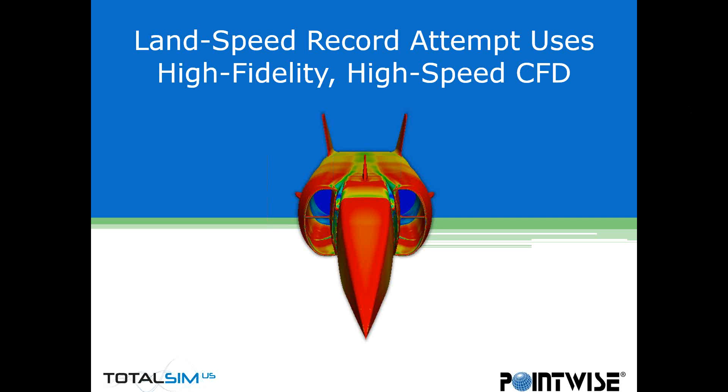Allow me to introduce the presenters for this webinar. First is Andy Liu from TotalSim. Andy graduated from the University of Southern California with a bachelor's and master's in aerospace engineering and aerospace design, respectively. He then spent 6 years working for Swift Engineering, where he performed CFD for aerospace and automotive applications, including a billion-cell automotive calculation as well as a passing maneuver simulation. Andy now works for TotalSim and helps further their aerospace capabilities using tools such as OpenFOAM and Pointwise, and Andy's actually the one that generated the grids and ran the calculations that we'll be showing off today.

My name is Travis Kerrigan. I'm a senior engineer here at Pointwise, and my responsibility is to work with clients and help strengthen their CFD process by introducing Pointwise into that process. I do this by developing either interactive solutions using our software or automated meshing solutions using our Glyph scripting language. I'm also active in a lot of marketing activities like webinars such as this, videos, as well as attending conferences.

Before I pass things over to Andy, I just wanted to mention that the purpose of this webinar is to showcase how the Spirit of America team inexpensively uses CFD to assess the performance of their vehicle. Such preliminary CFD studies really help to uncover trends like those that Andy's going to be talking about in the results section of this webinar. Early in the design, these are really critical for the design and optimization of the vehicle. So with that, I'm going to pass things over to Andy, and he's going to begin by talking about the history of the Spirit of America.

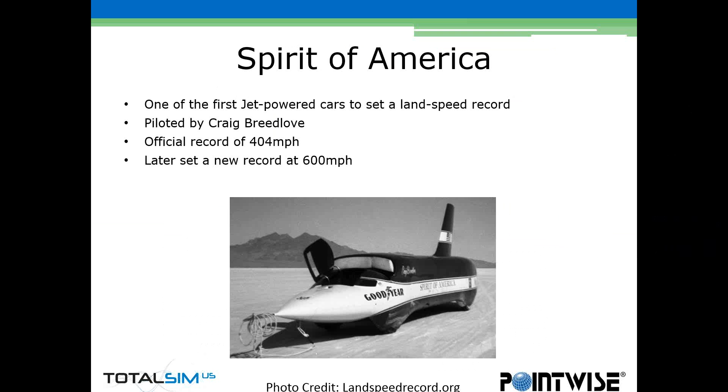Thanks, Travis. For those of you who don't know, the Spirit of America was one of the first jet-propelled cars to set new land speed records. The first car, piloted by Craig Breedlove, set the record at just over 400 miles an hour. Then in subsequent years, there was a little bit of back and forth until Craig set a new record in the vehicle pictured below, at just around 600 miles per hour. Since then, looking into modern day, the latest land speed record was set back in 1997 by a British group in the vehicle called Thrust SSC. The team was led by Richard Noble and piloted by Andy Green.

In the last couple of years, Craig Breedlove has expressed a desire to retake that record. He's been heading up a new team, also called the Spirit of America, and the chief aerodynamicist of that team is Neil Roberts, and it's going to be piloted by an F-16 pilot named Mark Zwieg. The intention of the new vehicle is to set the record at over 1,000 miles an hour, hopefully something that will stand for a long time. One of the new developments in this iteration of the Spirit of America that wasn't available before is the advent of CFD. The hope is that we're going to be able to assess the performance of the vehicle before it actually hits the salt flats, do some preliminary design and optimization, and finally understand the safety and stability of the vehicle itself.

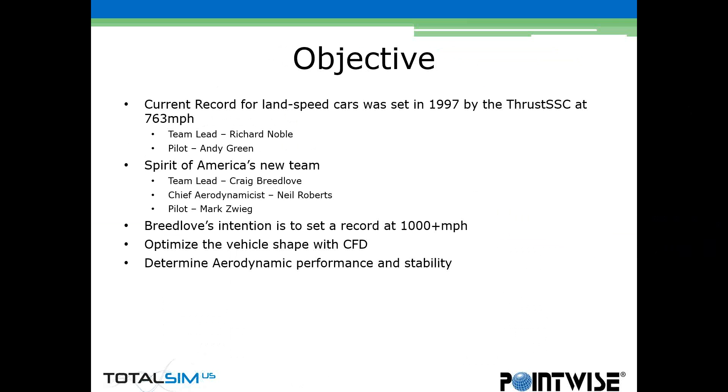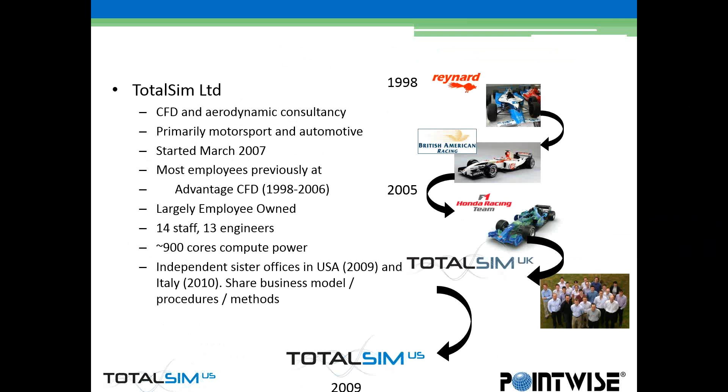So a little bit about us. I work with TotalSim. Our UK office was born out of racing. Over the years, they've been associated with a lot of different F1 teams. Then in 2007, they established their own group. And in 2009, we established the US office over here, based out of Columbus, Ohio.

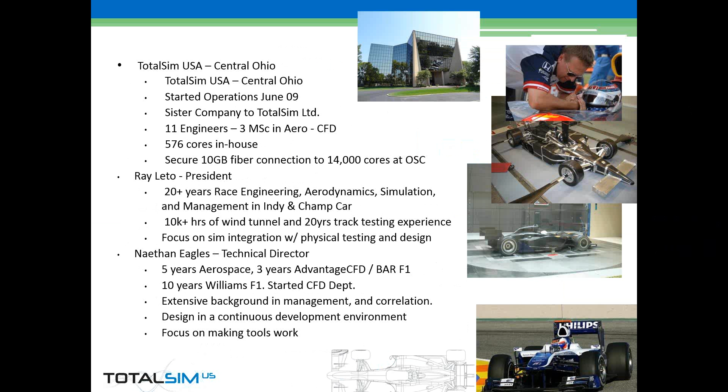So we're based out of Columbus, Ohio, and we've got about 11 guys on staff. In-house, we hold about 576 cores that we do a lot of our computations on. But if we do need to scale up, we have a 10 gig FiberNet connection down to Ohio Supercomputer, and there we can leverage over 14,000 cores, and that number changes all the time. Our president is Ray Leto, and he's got about 20 plus years of experience in the racing world, both as race engineer and team lead. Our technical director is Naethan Eagles, who started the CFD department at Williams F1. So we've got a pretty good group of guys and pretty good power in-house. That's a little bit about us. And then I'll hand it back to you, Travis.

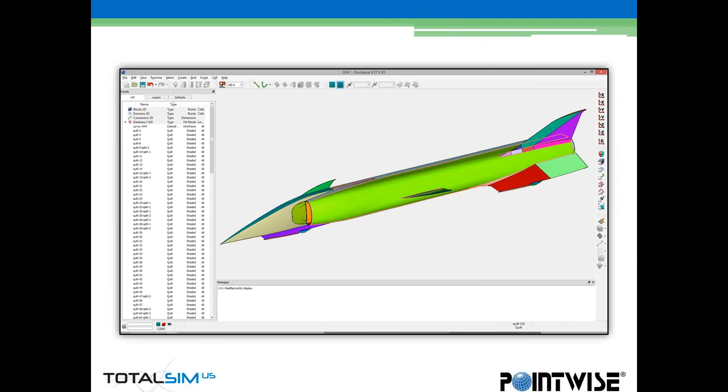The benefit of having a watertight solid is that surface meshing can be automated, very automatic. You can create a surface mesh on this model in as little as one click, and it'll be guaranteed to be watertight as well. As part of this cleanup process, it helps to organize, because after you have your solid model, the next step is quilting.

Quilting allows you to define what the surface mesh topology is going to look like before you even create a surface mesh. Different quilts represent different logical meshing regions, or where domains would lie on the geometry. You can see he's quilted this up - he has a quilt for the fins, the fuselage, the intake, etc. The benefit is that when he meshes this, each quilt gets its own domain, and quilt boundaries basically become the locations of connectors. This cleanup process further helps organize and simplify the geometry he'll be working on.

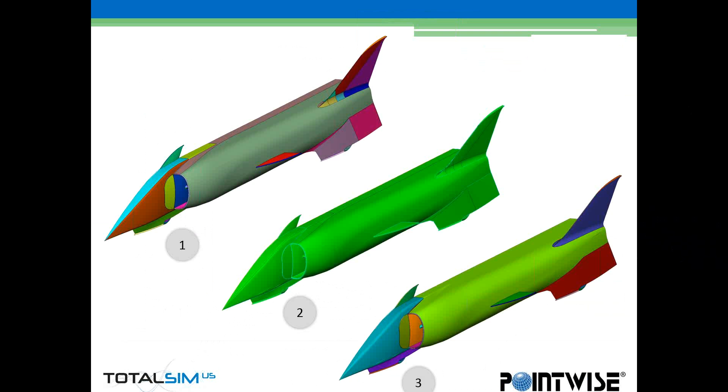Now, along with organization, the next thing is using the layer manager. The layer manager is a fantastic way to isolate and operate on entities without anything else going on. Reducing clutter is kind of its primary role.

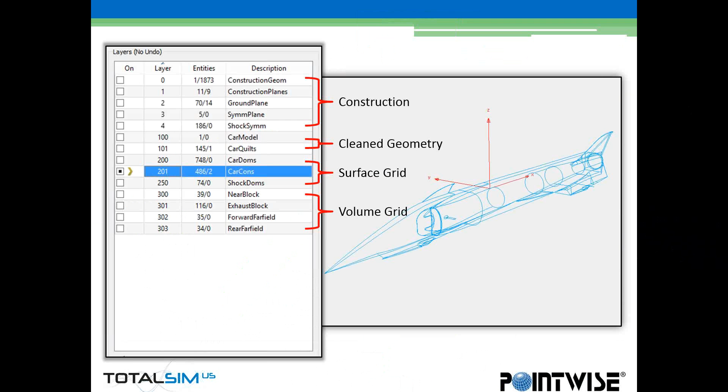He's created a number of layers for construction entities, and a number of layers to hold the geometry like the model and the quilts. He can isolate these - in this image you can see he's isolated the connectors of the vehicle so he can operate on them independent of anything else. He's also got a number of layers for the different blocks in the volume mesh, so he could isolate those as well. Layers are really beneficial when it comes to organizing your grid system.

However, an entity can only exist in a single layer at a time, so beyond organization, you can't really use them for an efficient means of selection.

To do that, you need to go to groups. Groups not only provide an additional way to organize your geometry and grid system, but also provide an efficient way to select multiple entities.

For example, Andy's created a group for the fin domains. He can select that group and it'll automatically select all the fin domains - in this image we just changed the color. But he could easily bring those into the grid solver and change some unstructured solver attributes if he'd like.

So if you find yourself performing specific operations on a set of entities frequently, it's really beneficial to create a group, not only for organization, but also for selection purposes.

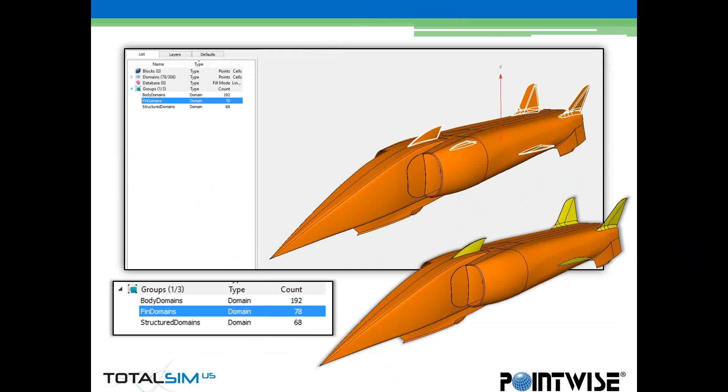At this point, he's cleaned up the geometry, organized it, and now he's thinking about creating that surface mesh. Creating the surface mesh can be done in as little as one click - you set up some defaults, select your model, and create an unstructured triangular surface mesh. But what Andy wanted to do is reduce the cell count on the surface, get some nice flow-aligned elements, help resolve curvature, and do this using structured meshing.

So what he did is he identified some quad-looking quilts on the surface and simply deleted the unstructured domains, creating structured domains in their place. The idea here is that for the lip, these efficiently resolve the curvature of this intake lip without using nearly as many cells as the triangle equivalent would.

Imagine diagonalizing each of these quads, you would have 2 triangles per quad. And if you can further imagine, in the volume mesh, as we extrude off of these, we would get hexes that are relatively flow aligned. He did the same thing for the intake strut as well as the top of the fin, identifying these rectangular looking patches, deleting the unstructured domains, and replacing them with structured domains.

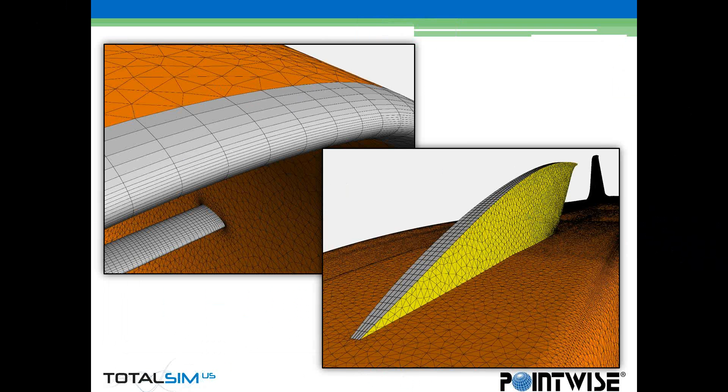One thing to keep in mind when you're doing this is that you want the transition from structured to unstructured to be as smooth as possible. You can see these quads are roughly the same size as the triangular elements, and this is going to help when T-Rex is used to create your boundary layer portion of the mesh.

Another area where Andy elected to use structured meshing was the exit of the engine compartment, this tubular structure. Typically what we recommend for things like this is a butterfly topology or an OH grid, which you can do in as few as 5 structured blocks. The benefit there is you can run it through the elliptic solver, you get good orthogonality, flow alignment, and that topology supports boundary layer control.

So you can continue to cluster elements in the boundary layer region, and then you could propagate this downstream as far as you would need it to capture any additional flow features that you'd like to.

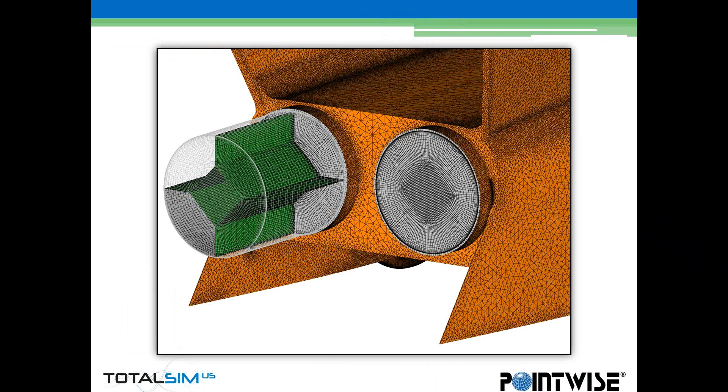The last region where Andy used structured meshing was outside of this near field hybrid block that he created right around the vehicle. Inside that block, it's going to be using T-Rex to generate the volume, but outside that, it was relatively simple, and he was able to assemble some structured blocks that were flow aligned. You have good quality hex elements with a reduced cell count.

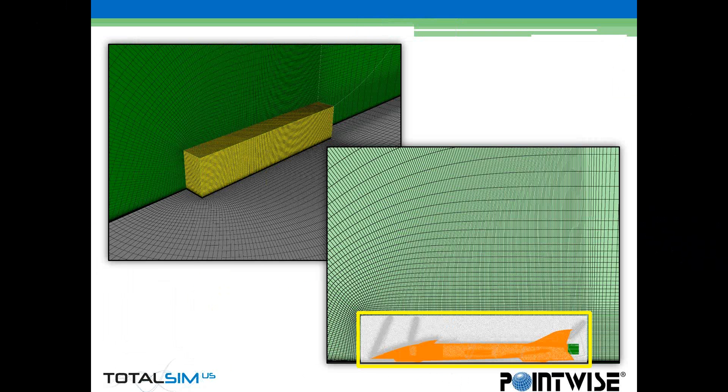So once everything's been organized, he's got his surface mesh, and he's replaced the domains that he would like to with structured domains. The next step is to populate that inner hybrid block using T-Rex.

T-Rex stands for anisotropic tetrahedral extrusion, and we've talked about it a lot because it is a fantastic way to automatically create boundary layer resolved grids. Traditionally, the way it's worked is it would work off of a triangular front, advancing points and creating these stacks of right-angled tetrahedra.

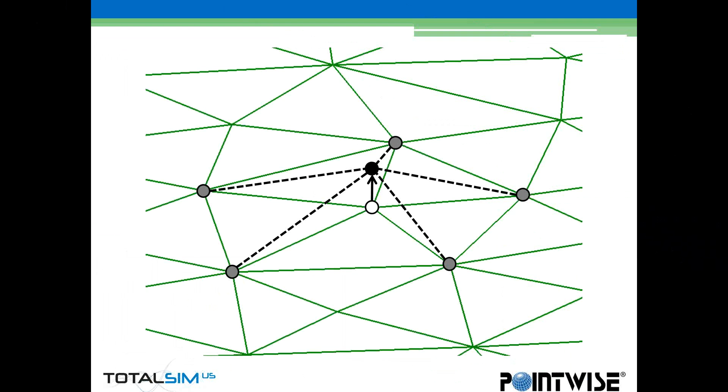So in this example, we're advancing a point and creating a fan of right-angled tets. These points, or the elements, would be checked against quality criteria that the user could specify. If a point violated that, it would stop locally but continue advancing everywhere else. Once the entire front was done, and you have these stacks of right-angled tets, we would combine them on export into triangular prisms that transition very naturally to an isotropic tetrahedral far field.

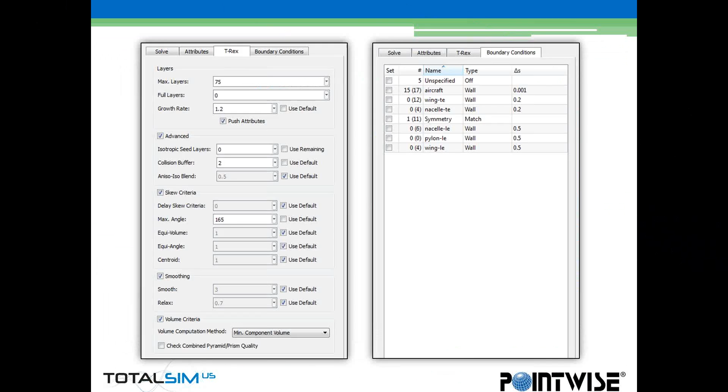Now, how did we handle quads? Well, if you had a quad domain in your mesh, what we would do is insert a pyramid that had the same height as that initial spacing you'd specify. That basically presents T-Rex with a collection of triangles, because each pyramid would expose 4 triangular faces, which we would then pass on to T-Rex and march right-angled tetrahedra off of.

And then after combination, we would get triangular prisms, but in the first layer, you would still have these really high aspect ratio pyramid elements. It turns out solvers tend not to like those very much, so we had to think of a new way to handle marching off of quads using T-Rex.

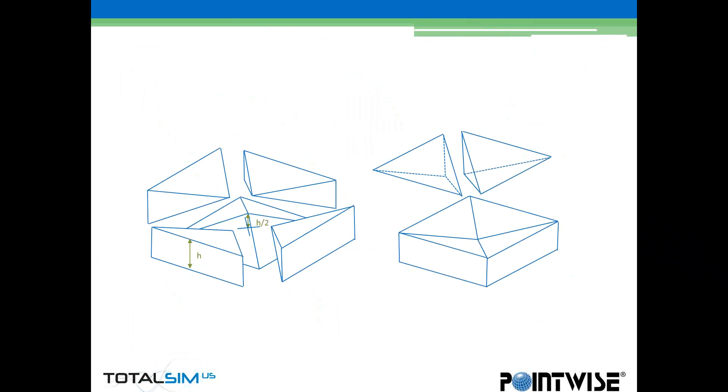What we came up with was another approach for creating pyramids off the surface. What we do is create a pyramid off the surface that's half the height that you specify, half that initial spacing. We then create 4 side pyramids around that that have the height of the spacing you've specified.

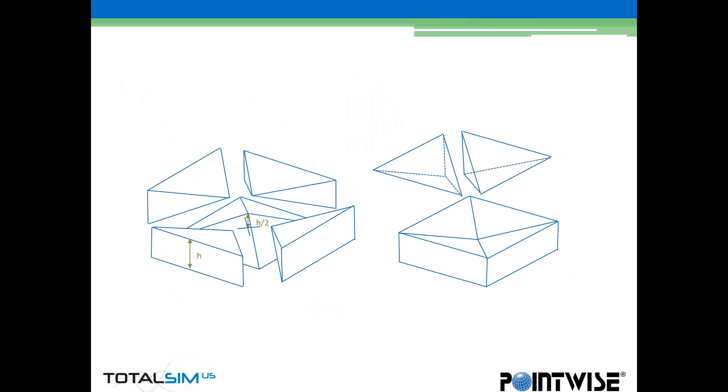And this creates a topology that has a divot in the top, and we fill that with 2 cap tetrahedral elements. Now if you combine all of these, you get a hex in the first layer. But what this does is it exposes 2 triangular faces per quad, which we can then march right-angled tetrahedral elements off of.

To illustrate this, these images were taken with Insight. You can see we've got a quad surface mesh. We've inserted some pyramids, put in the base pyramids and the 2 cap tets, again exposing 2 triangular faces per quad. We then advance right-angled tetrahedral elements off of that, and then as a post-processing step on export, combine these into unstructured hexahedral elements.

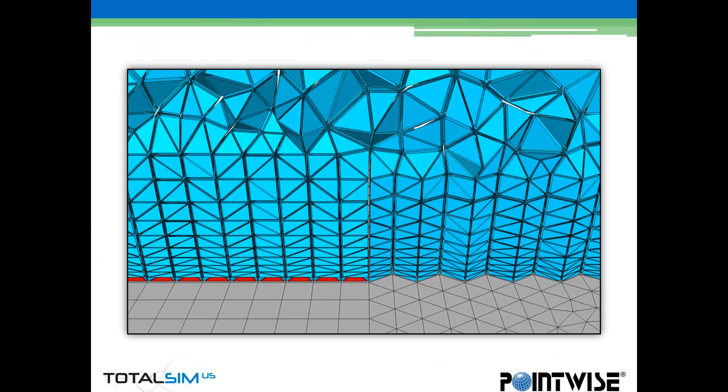The benefit is that if you have a surface mesh that consists of quads and triangles, you use the same parameters in T-Rex, those same 2 panels, and you get the advancement, and then afterwards on export we'll combine into unstructured hex elements and triangular prism elements that are point and face matched at their interface, all automatically, transitioning naturally to isotropic tets in the far field.

To show you what this looks like on this model, you can see the complexity of the surface mesh, and T-Rex marching is able to navigate these concave corners very easily, marching out of this concave corner formed by the fin and the fuselage. Down here you can see the surface mesh with triangular elements as well as quads. You've got the triangular prisms transitioning to hexahedra as it wraps around that intake lip.

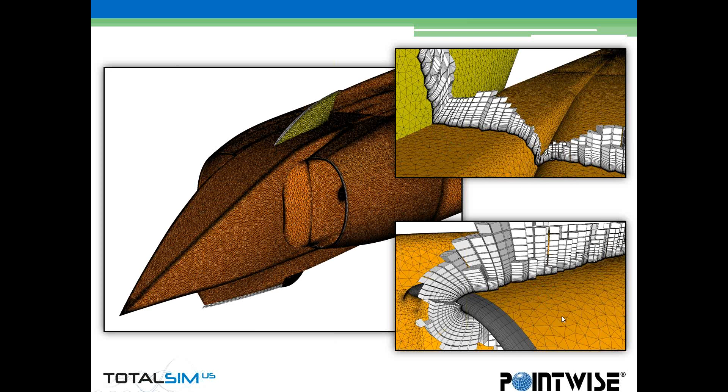The final cell count for this grid was about 30 million: 4 million hexes, 8.5 million tets, and 17 million prisms. The reason we had more prisms in this mesh was because the surface grid consisted primarily of triangular elements.

This grid took Andy about a day and a half to create from start to finish. Actually, initializing the volume mesh with 30 million elements only took a few minutes on a laptop, but it's the process of cleaning up, organizing, creating that surface mesh, deleting the domains that you would like to replace with structured domains - that whole process, combined with the initialization, was about a day and a half start to finish.

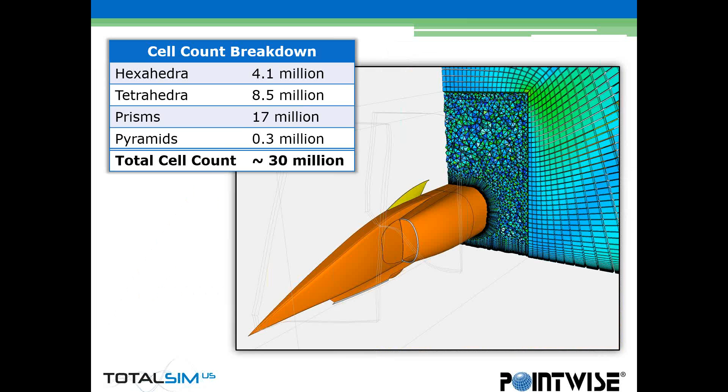Now, that volume mesh was relatively isotropic. There's not a lot of control out there in the initial mesh for capturing things like shocks that accurately. So one of the things Andy found is that, as this vehicle is traveling transonically, supersonically, you're getting shocks, and to capture these things you need additional refinement in the volume mesh.

And to do that, we recommend using a baffle. A baffle is basically a way of explicitly placing points in the volume mesh for additional refinement. So when Andy ran this calculation, he found that shocks were forming. He was able to export some iso surfaces of Mach gradient from his post-processor, import them into Pointwise as STLs, then sketch unstructured domains on these STLs and extrude them to create prism blocks.

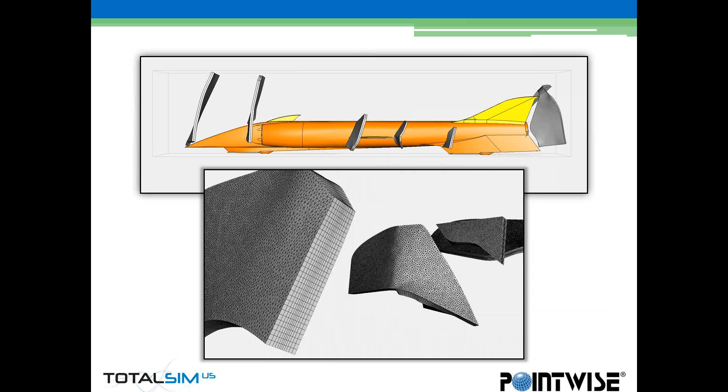So with that, I'm going to pass things back to Andy, and he's going to start by talking about setting up the boundary conditions for CFD++.

Thanks, Travis. So like you just mentioned, these solutions were run in CFD++, and that's a commercial software written from Metacomp Technologies. So here's kind of a basic layout of how the boundary conditions were set.

Because we generated a viscous grid with boundary layers, we were able to set the majority of the vehicle as a no-slip wall. Subsequently we had the rotating tires, front and rear set, which were modeled as no-slip rotating walls. The customer provided us with some of the engine specification data, so we knew what the anticipated static pressure was supposed to be at the engine inlet, and then the engine exit was just a mass flow matched boundary condition.

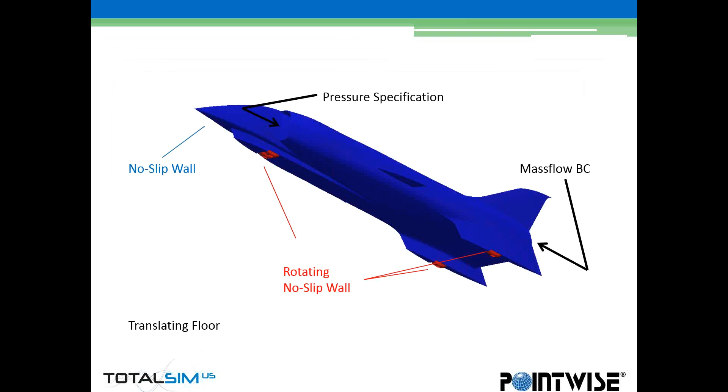Then finally, because this vehicle sits pretty close to the ground, we found it necessary to set the floor as a translating wall. This isn't necessary for all vehicles, but because we anticipated that there might be some ground boundary layer effects, this was the reason that we took that approach.

One thing you'll notice is that we've done a coarse sweep, and the reason is that this is the first pass CFD iteration. So the purpose is just to get an understanding of what the vehicle is doing, not so much to populate an aero map of the vehicle.

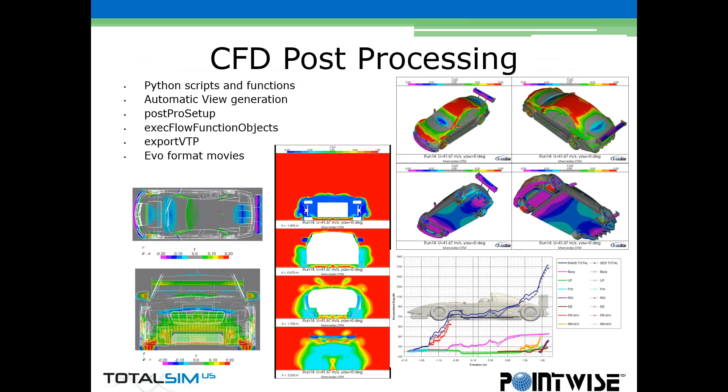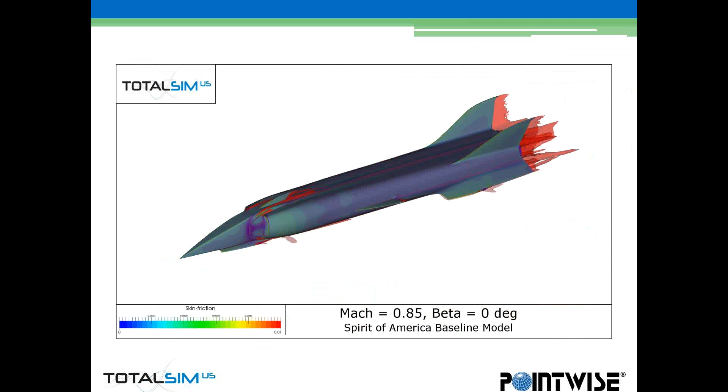One of the reasons you're not seeing it clearly is that it's difficult to visualize the shocks with CPX. It's not the best metric to view it.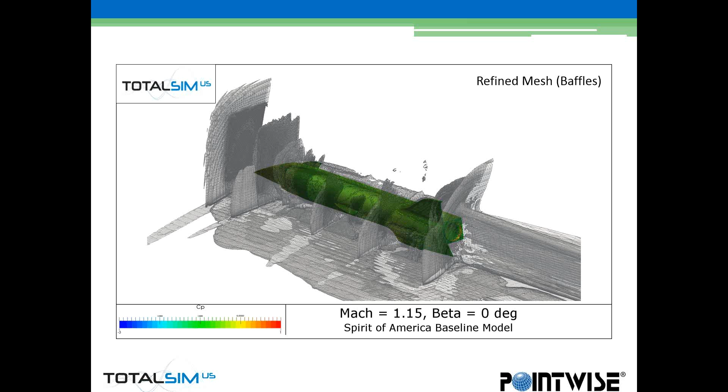Now with the refined grid, this is kind of the solution with the Mach gradients plotted into the isosurface. You can see the areas of high density in the local block. That's exactly where we've generated the baffles. So the approach that we took to refine or adapt the mesh ended up being rather successful in this case, because it helps us better see where the shocks are being generated. Again, we're only interested in where they're being generated and not so much how far they propagate.

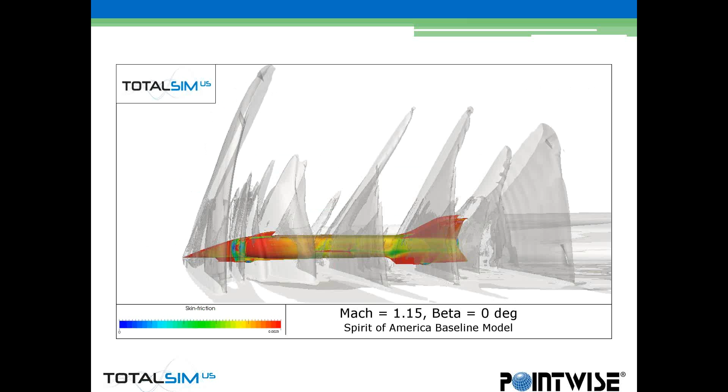So in conclusion, after doing this study, one, we found that the CFD results that we got were showing us reasonable force trends on the vehicle. So the drag and the lift that we were expecting to see on this vehicle, we can take, obviously we'll take it with a little bit of grain of salt, but it just goes to show that the mesh approach and the setup approach that we used for this particular exercise is, I would say, adequate.

The baffle refinement approach that we used to determine where the shocks were happening was, again, a valid approach. It allowed us to see exactly what we were looking for without going too crazy into analysis. And finally, the force numbers at the high Mach solutions just kind of indicate that we've got a little bit of work to do. A little bit of optimization might need to be done on surfaces, but with that, we'll do a small redesign of the vehicle and get ready to look at the next iteration in CFD.

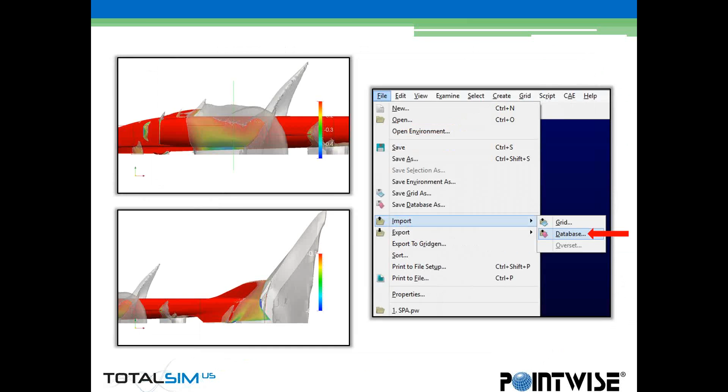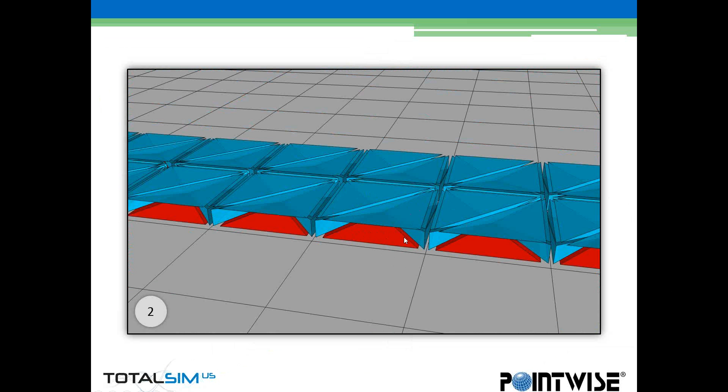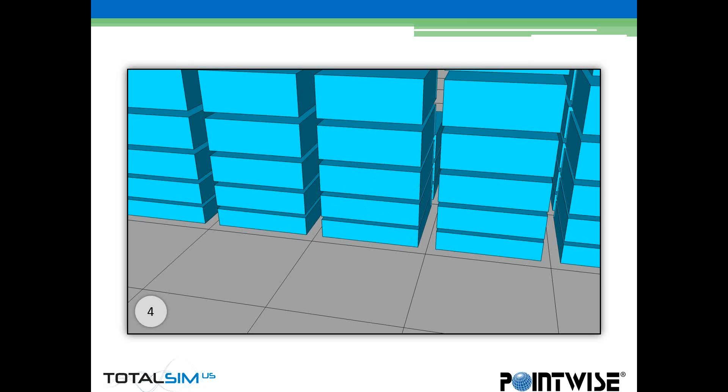Now, in T-Rex, we're not combining the elements, so these 2 triangular faces are used to stack right-angled tets like we normally do. You can imagine joining those right-angled tets — you join 6 of them and you get a hex. That base collection of elements becomes a hex, and then the collections of right-angled tets on top of that become hexes for the remainder of the layers. So that's how that works.

There. Okay, let's see.

One question is, how are such big projects handled? Say if one wanted to go back a number of steps, are there a limited number of undos? Maybe you could expand upon that question a little bit.

Are you talking more about the meshing? Because if you're talking the meshing side, I think in Pointwise the max number of undos you can specify is like 20, so as you're generating the grid you can back up. Obviously, we recommend saving at various stages as well.

Do you have anything to say about that, Andy? Yeah, along with the organization you mentioned, there were a couple times I did have to backtrack because I would go off in the wrong direction as far as generating the kind of grid that I desired. So having everything organized in a very concise manner really facilitated being able to backtrack and go forward.

One of the big steps is really getting your surface mesh to the point that you want it, and that's a giant milestone right there. Having everything organized up to that point, especially saving that out, and then moving forward from there — because there's a ton of different ways that you can generate your volume mesh.

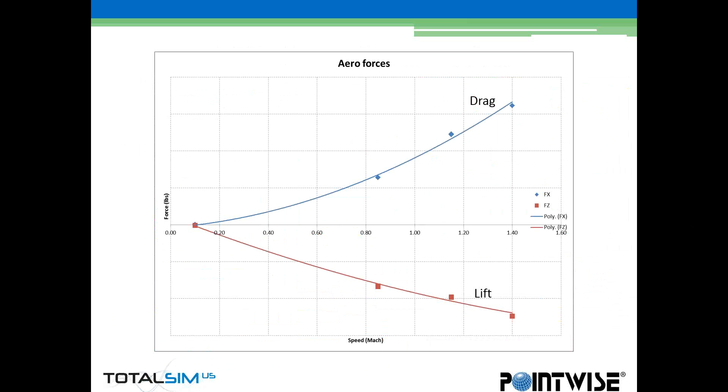Was there some lateral stability analysis done, and if so, what did it show? Yeah, we did do a little bit of lateral stability analysis. I don't remember the yaw numbers off the top of my head, but it was essentially self-correcting. The fins that Neil provided on the rear of the vehicle were sized large enough that we did have at least the correct direction of yaw, and that's about it.

Also, the crosswind conditions that we looked at were all less than one degree, so they weren't super aggressive. It wasn't that we would see crazy numbers in those yaw conditions.

How did you estimate the size of the far field boundary, and did you use anything to avoid signal reflection from the far field? For the first pass, the far field was sized for an incompressible type problem. That's obviously oversized, at least upstream, for the supersonic case. CFD++ has a Riemann solver built in for its far field, and it also has some far field damping parameters you can set. We opted not to—probably should have, I suppose. But in general, the upstream far field for the high Mach cases was oversized, so I don't feel those were necessarily required.

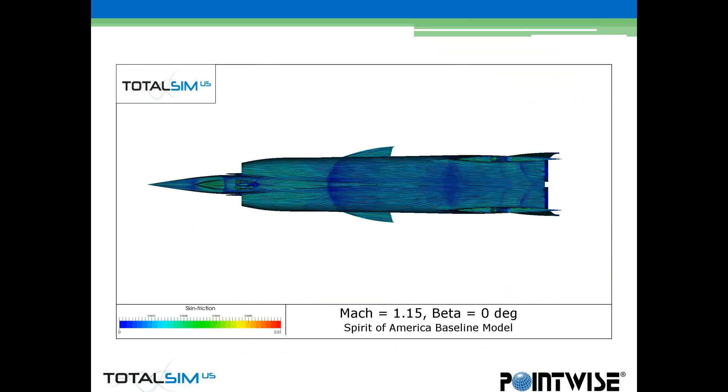In terms of the skin friction for the higher speed cases, those of you who are interested, if Andy's able to share those, you can contact him at that email address and connect up.